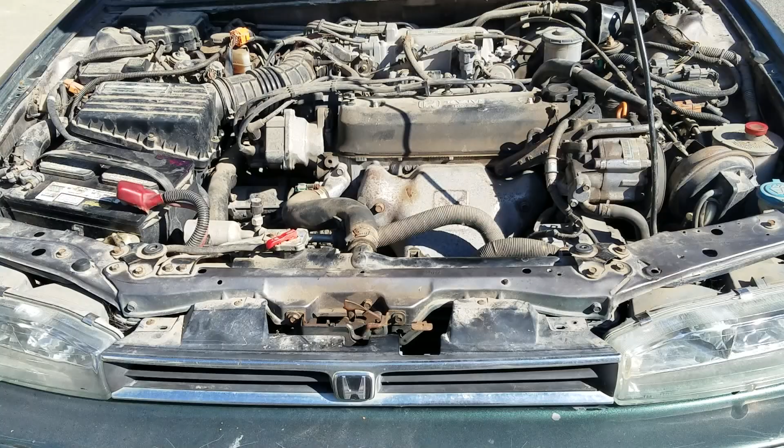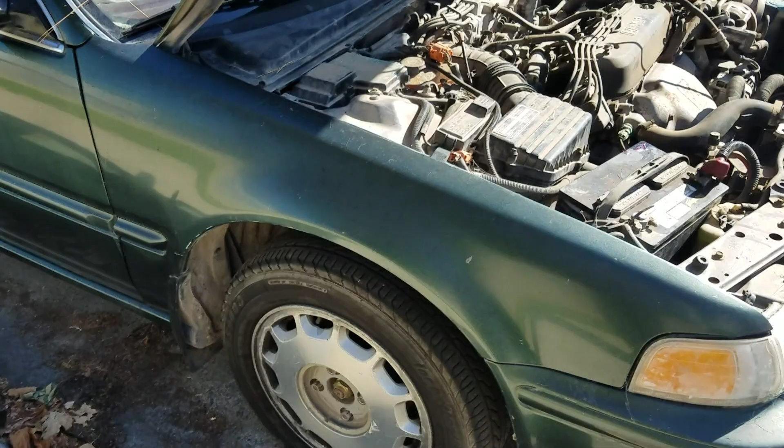A 1990 Honda Accord EX. The customer was telling me the idle is going up and down, which I haven't been able to duplicate. However, I can hear the idle is a little bit high. I also saw the check engine light bulb has been removed from the back, so someone tried to hide that bulb, and that's the result.

What I will be doing here today is pulling for codes, and then we're gonna go from there, because the check engine light has a code. I can barely see in the background the check engine light is illuminating. You can see it there. So someone did some type of hiding fix, trying to remove the bulb.

We're gonna turn it off. It should come on for the self-test. Barely we can see it in the background. Start it, and the light comes on a little bit right there. So we have a code, that's why they removed the bulb or tried to do something with that. So we're gonna be checking for codes here.

Here on the passenger's side, below the glove box on the right hand side, is the connector. We use this jumper, and we're gonna count how many times the check engine light flashes, and that's the code. The first digit is gonna be slow pulses, like this, 2 times, for example, that's 2, then 4, something like that. We join the slow pulses with the fast pulses to see what code we have. So I'm gonna be setting this up here.

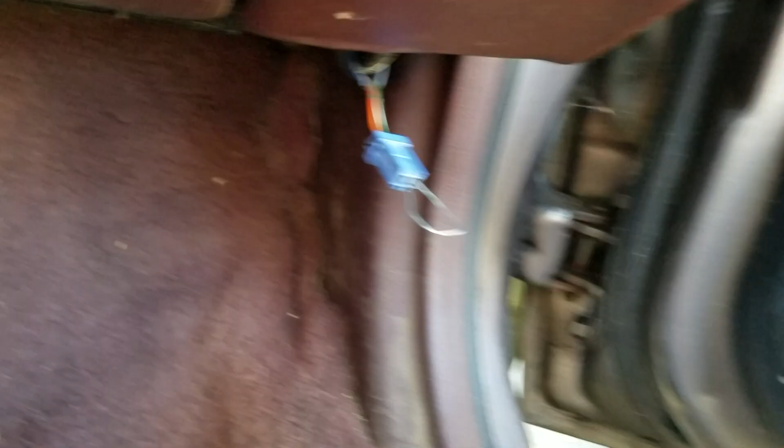Now we have it jumped, so we're gonna start counting how many times this is flashing. Key on. That's the self-test. 1, 2, 3, 4. Okay, right now we're gonna start. 1, 2, 3, 4, 1. 41. 1, 2, 3, 4, 1. It repeats the same code 3 times.

1, 2, 3, 4, 1. If it has a different code, it will start reading a new code. 3, 4, 1. 41. So it only has one code. It repeats the same code 3 times. If you have like 3 codes, it repeats each one 3 times, then the next code another 3 times, and like that. So it only has code 41. We're gonna investigate what code 41 is and see the testing procedures.

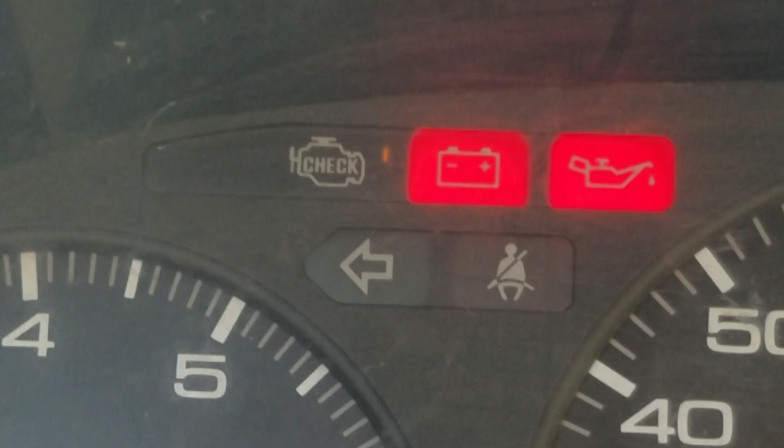We gotta keep something in mind on these vehicles. This is an OBD1 system, a 90 Honda Accord. Basically this system monitored for opens and shorts, not that much for rationality or functional tests. So if this code is present all the time when the vehicle is running, something's gotta be occurring right now. Normally it gives you the code with the check engine light on, then when you turn off the vehicle the light goes off, and it comes back on when the fault occurs. That's how OBD1 was designed.

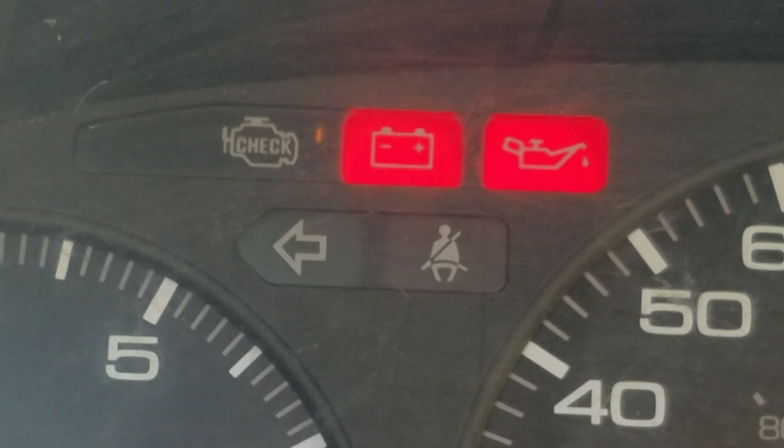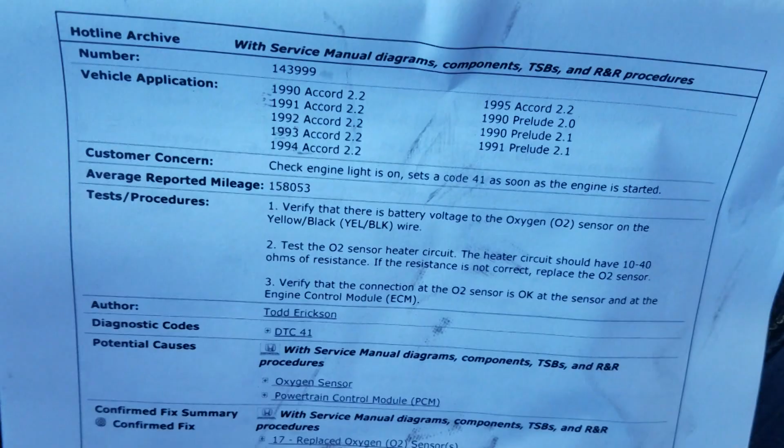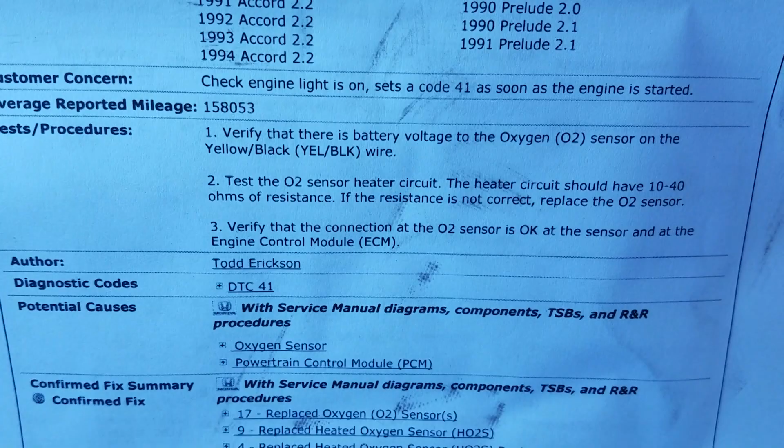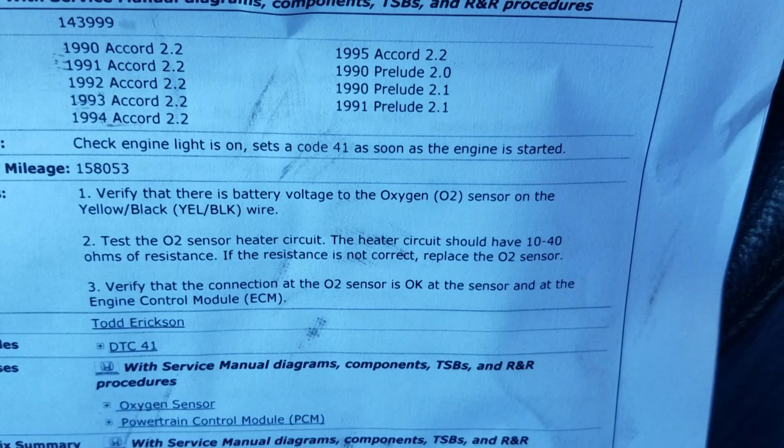So we're gonna investigate what code 41 is for and what testing procedure we gotta do. I got the information here from Identifix. For code 41, it says it sets as soon as the engine started, so that is our situation. Average mileage 158, not relevant, but the test is very important. 1, verify there is battery voltage to the O2 sensor on the yellow/black wire. 2, test the O2 sensor heater circuit; it should have between 10 and 40 ohms. If the resistance is not correct, replace it. 3, verify the connection at the O2 sensor and the engine control module is okay.

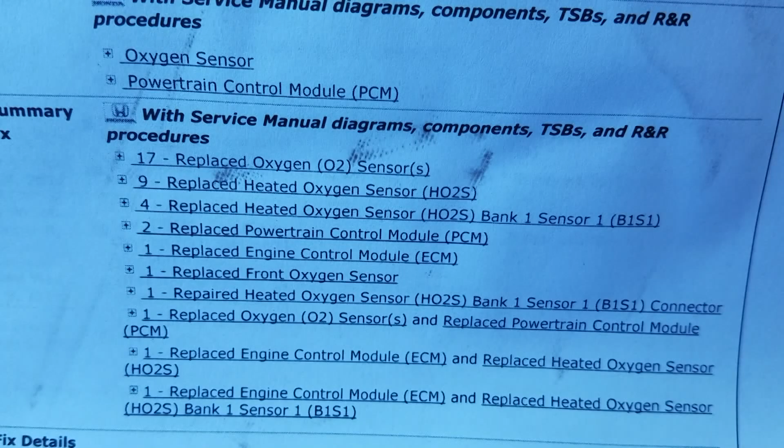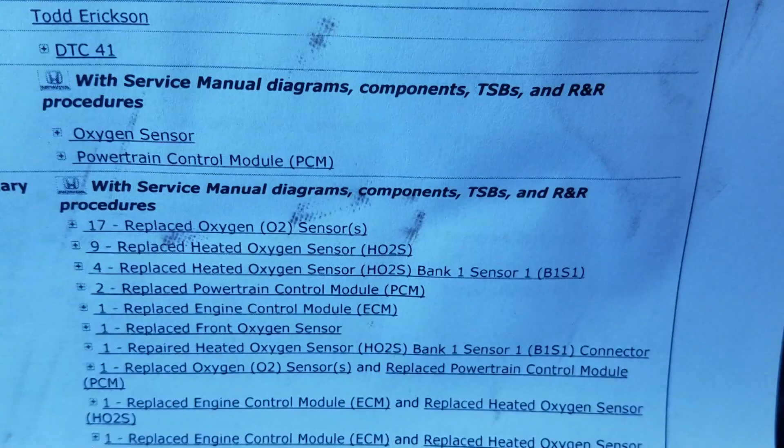We can see here what people reported: 17 replaced the O2 sensor, 9 replaced the O2 sensor, 4 replaced the O2 sensor, 2 replaced the computer, and another one down there replaced the computer. So we're gonna do the testing: check resistance on the O2 sensor and the signal from the computer.

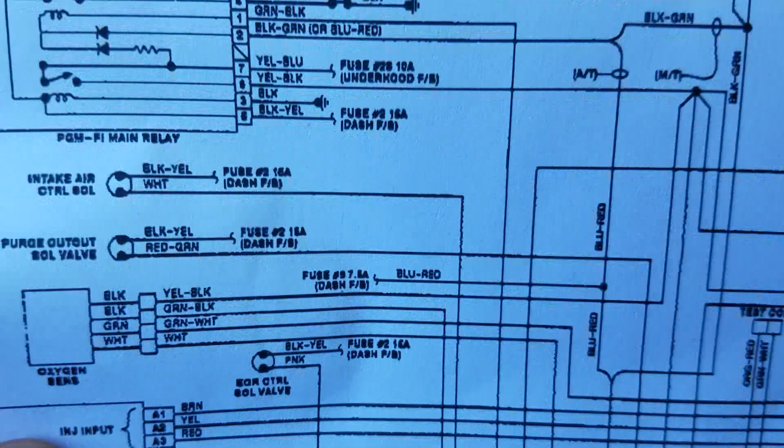I've prepared the wiring diagram here. We can see the O2 sensor here. It's a yellow/black right here. Usually when they mention yellow first, it means the wire is mostly yellow with one black stripe. The other one is green/black. Those are the two wires for the heater circuit. Let's go test that.

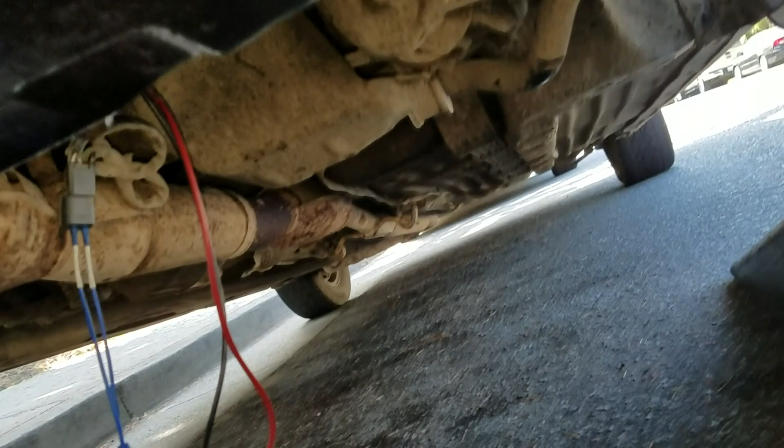So I am connected here on the back of the O2 sensor connector. We can see there are two wires of the same white color. I got those spliced here, and I'm gonna bring them out to the ohm meter.

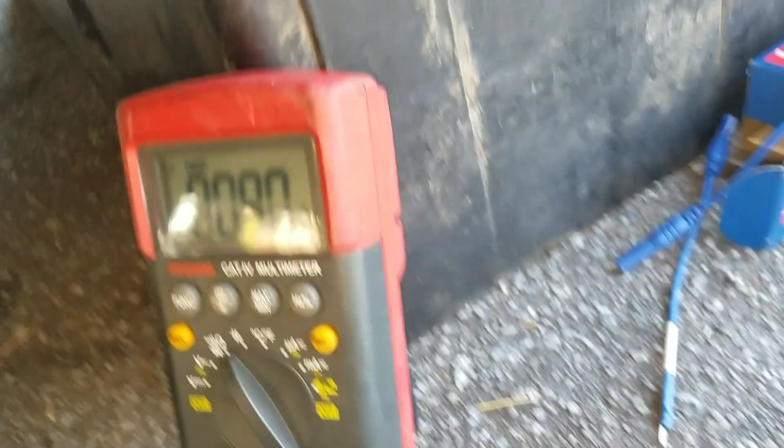The instructions say 10 to 40, I think. Gotta go back and check those. But we're gonna compare that one to the new sensor too. And also I need to check the signal coming out from the computer and see if the computer is sending out the signal and power side to the heated O2 sensor.

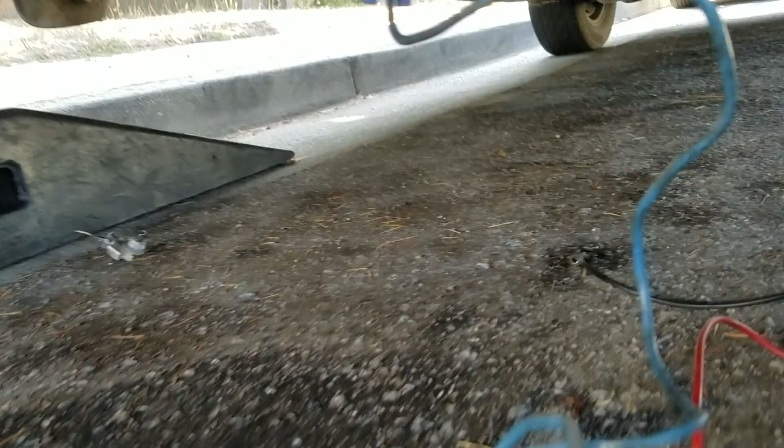I am connected here to the harness side, and got two pins there, but the red, well, the blue is the one that is power side, and I got my ground here. So I'd like to verify if that one is a good power too, that it can handle load. So I got here my test light, because the voltmeter is reading 11.8 volts. So I will hook up my test light over here,

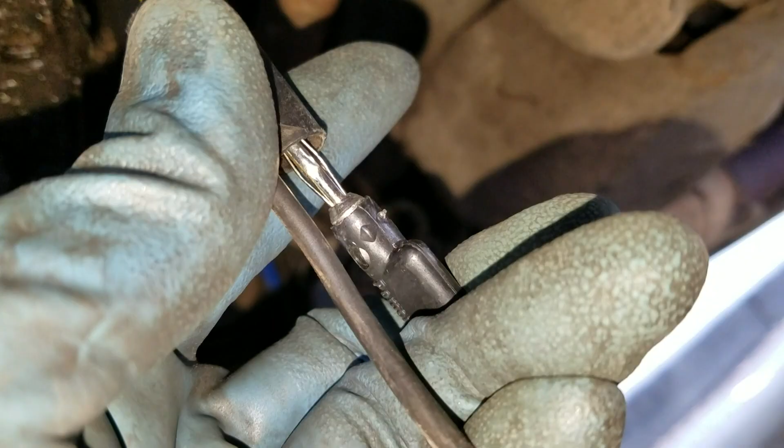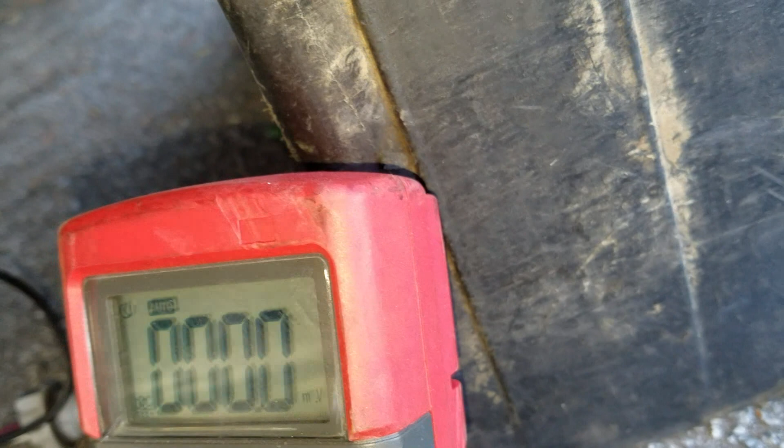and then the other end we're gonna connect to ground side right here where I have my other connector, and see if the test light illuminates. So to verify for good power. So what happened? You dropped it to 0. See? What happened? Why did you drop it? Do I have a good ground or what?

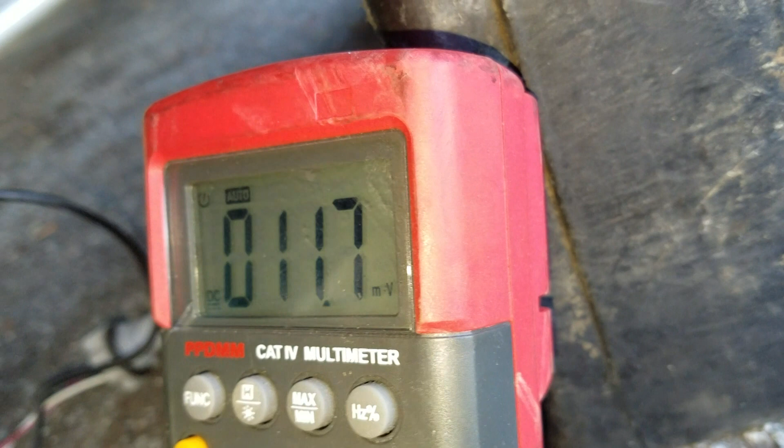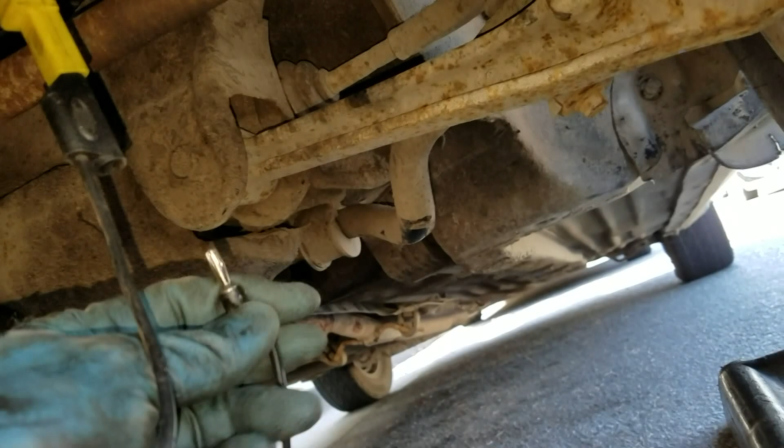Let me disconnect it here and see if the voltage comes back. Yeah, the voltage came back. Let me see if I am on the wrong wire, because you can see I got my test light here, and as soon as I connect it to ground right here, as soon as I touch here, I'm dropping the voltage. Then when I'm connected to ground, release.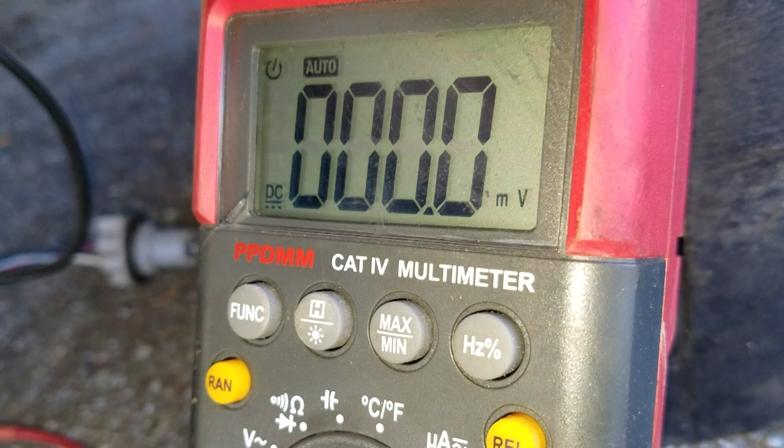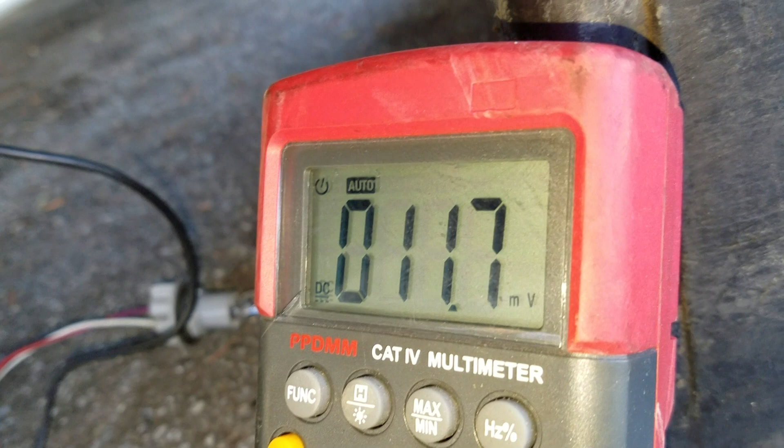So that voltage is coming from where? Is that real voltage or is that bias voltage on the ground side? So I'm gonna be swapping the connectors there, I mean the pins up here. Because I just picked up one, I didn't really check a wiring diagram here. So it's gotta be one of those two options. So let me check now and swap this one to the next pin. See if my reading changes, or what do I get here?

Just one hand here, so bear with me.

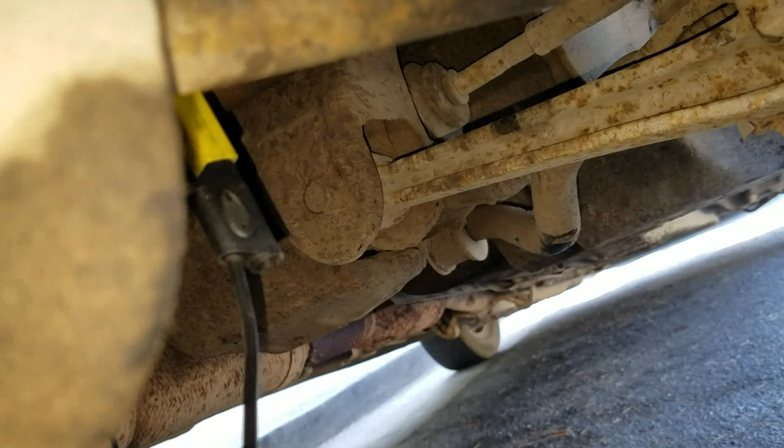This is interesting because when I connect it to the other pin on the harness side, I get 12.3 volts. So I'm gonna connect this one to ground and see if my test light illuminates. So I have my test light over there, and then I'm connecting to ground right here. See, connected there. Test light illuminates, and I have 11.3 volts, so some voltage drop there because it is drawing a good amount of current.

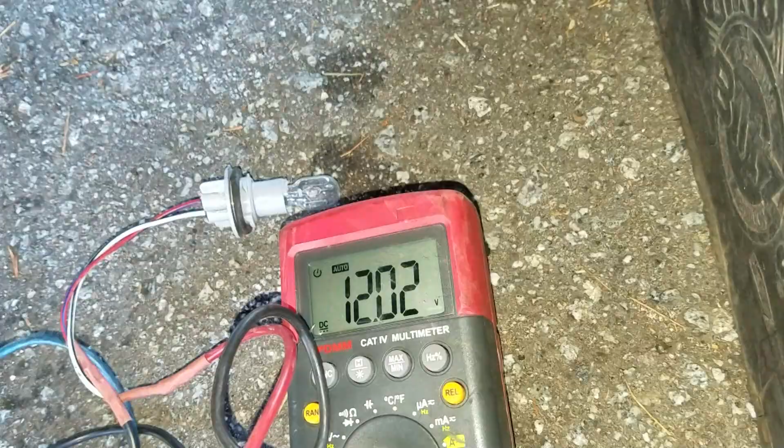Okay, so we have good power to this, and the other one is the one we saw, like 12 millivolts. It's bias voltage coming from the computer. That's pretty good. It's telling me my wire integrity is good from here to the computer. Now we have to load test the circuit with the test light across.

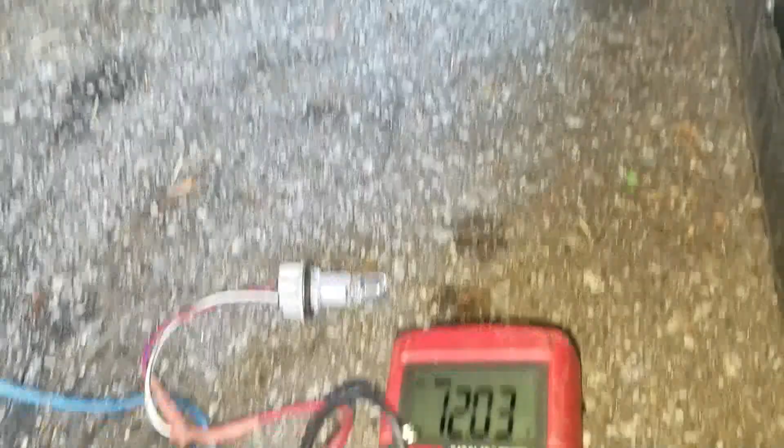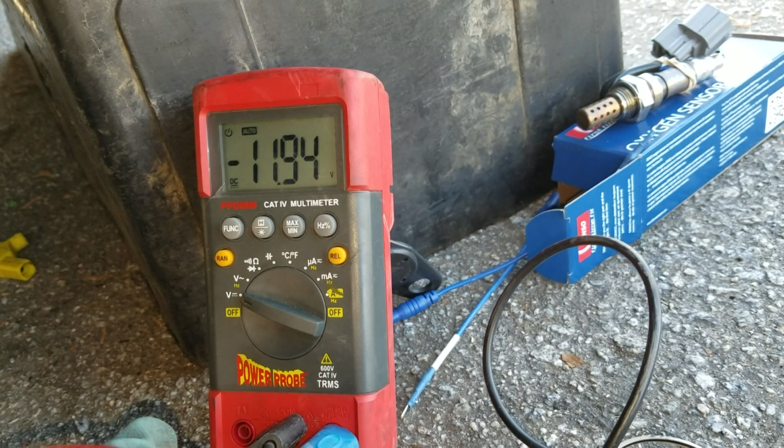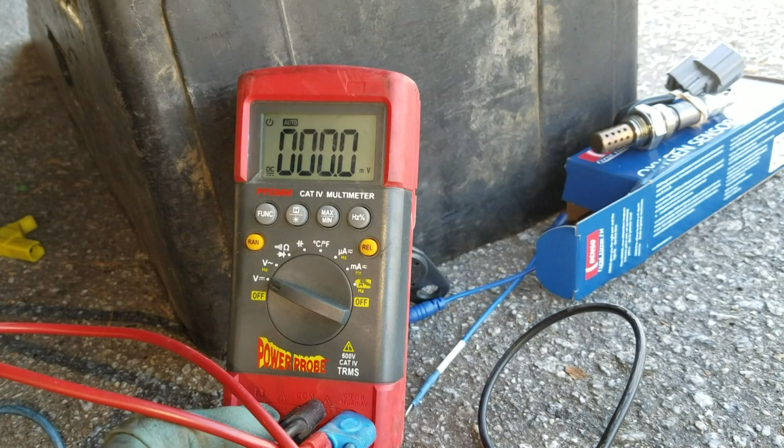I'm gonna go and start the vehicle now. So I got the two pins connected there on the harness side, and I brought them down here to the voltmeter. As we can see here, when I take the test light out of the picture, I have some negative voltage. So when I connect the test light right here, the voltage goes to 0. So I'm gonna start the vehicle now and see the light illuminate.

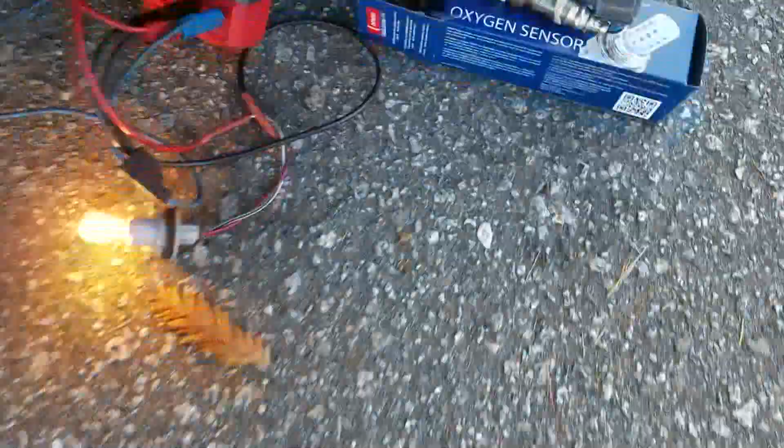I have the test light connected down there, so I'm gonna start the vehicle now. Start the vehicle. So the light hasn't illuminated here yet. Gonna go and see if my test light illuminates. And yes, we can see the test light illuminates here. So powers and grounds are proved to be working correctly. And we can see here, no light anymore. Let me turn it off.

You know, this is too much. I think the ranges they give us here, 10 to 40 ohms, are way too crazy. I have about 12, so you would think that one is good. We're gonna compare to the new sensor now, the new O2 sensor.

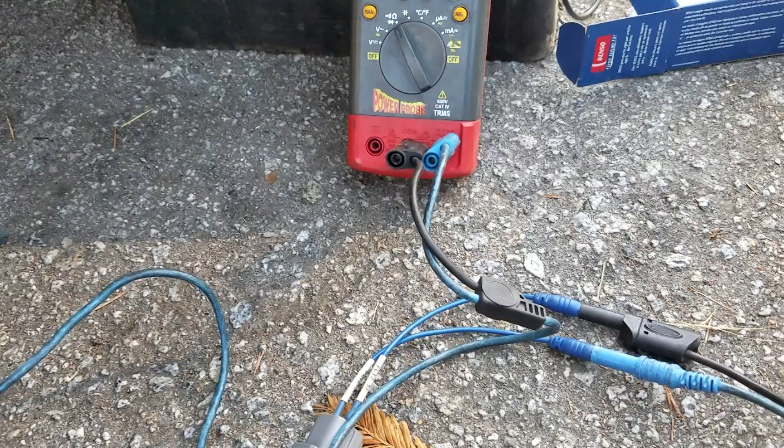So as we can see here, I got my Denso O2 sensor here. The two colors are the same, black on the sensor side. Those always are gonna be the heater circuit. In this case two black, but sometimes it can be two white or two gray. Depends on the manufacturer. Denso usually likes to use black. I think Bosch likes white, but the two colors are the same. But look at this.

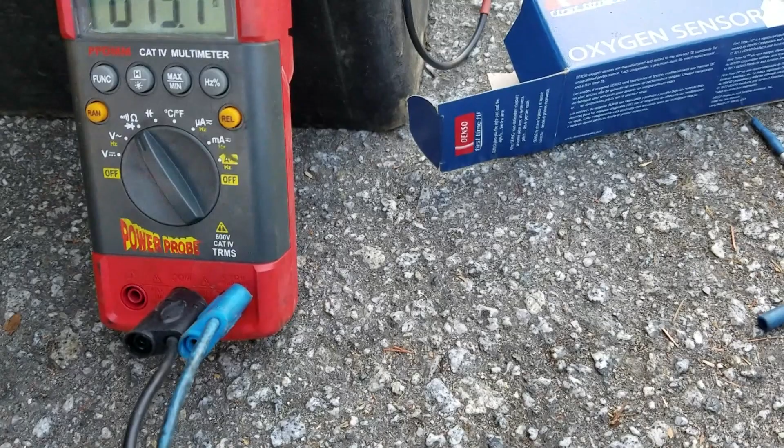I have 15.7 ohms, and the old O2 sensor has 9.1, almost half. So as we proved, the computer is sending the signal there, and when I substitute it with the test light, it works.

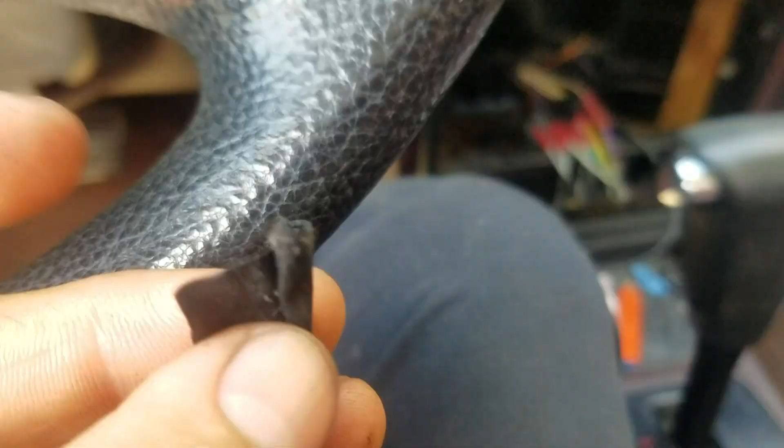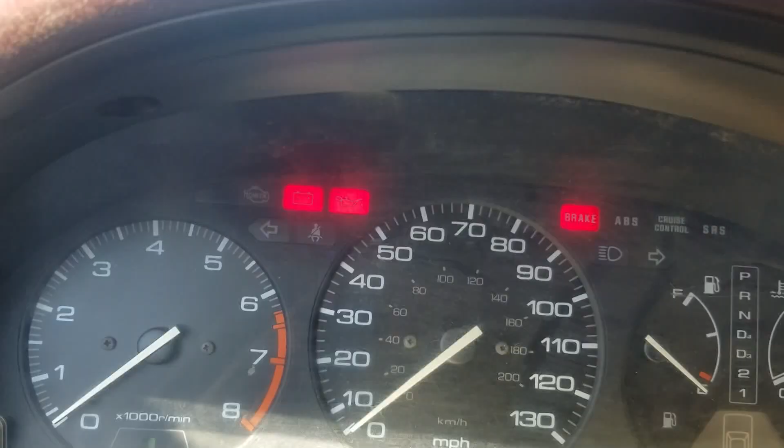Well, we're gonna try to duplicate the customer concern. I couldn't yesterday, and he keeps telling me yes, it does it. Goes up and down. So I need to duplicate the condition to start testing something else. We're gonna try to duplicate, and I'll record if it acts up.